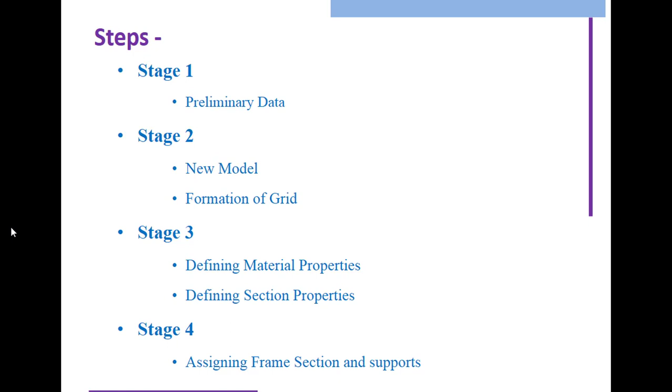After that, assigning frame sections and supports. When we construct everything, we need to provide the support to the columns, support to the building, like whether you want to make it sway or non-sway. Basically we make it non-sway, right? We provide fixed support at the bottom, because in fixed support we get three reactions: one vertical, one thrust, and another one is a moment. So these three reactions we will get in our fixed support.

Now after that, stage number five is assigning the load. We need to assign the different load conditions according to IS 875 and our manual calculations. After that, stage number six is the analysis and comparison of base reactions. This is one of the important steps. In this stage, we need to analyze and compare the base reactions we got due to the load combinations, the different loading results we are getting.

Then step number seven is defining load combinations. As I told you earlier in my Module 1 lecture: dead load plus live load, dead load plus wind load, dead load plus wind load plus live load.

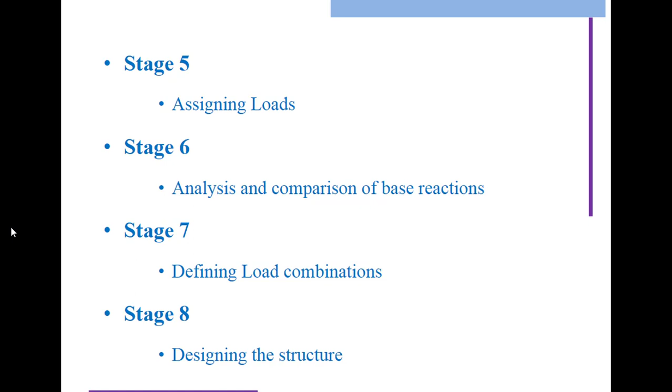Okay, these are three different kinds of combinations for collapse and serviceability that we need to check. After that, designing the structure. When you go through all these things, when you've got lots of checks, corrections and trial and error, after that we will go for the design of the structure. Okay, so let's see stage number one.

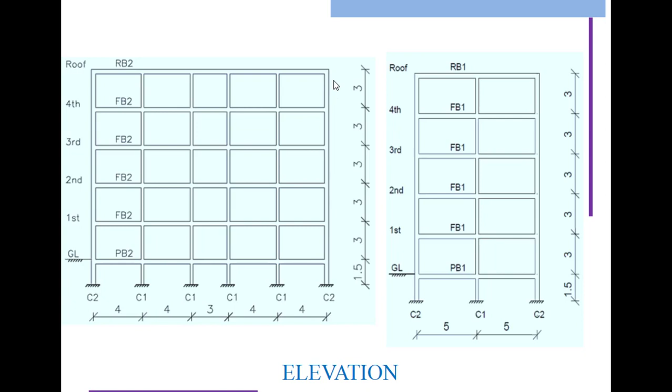After that, here you need to provide the material types, like concrete and rebar. Rebar is reinforcement. Specification like Indian M20 or Indian high yield strength deformed grade 415 bar. So we are using concrete M20 and rebar HYSD 415. Your columns are 300 by 500, 400 by 400, 400 by 500, and beams are 300 by 600, 300 by 500, 300 by 400.

You can see one common thing: the width is constant in all, and the depth is varying. Why? Because as the distance increases and as the story height increases, your depth will increase. And we are considering a slab thickness of 125. All these data are in mm.

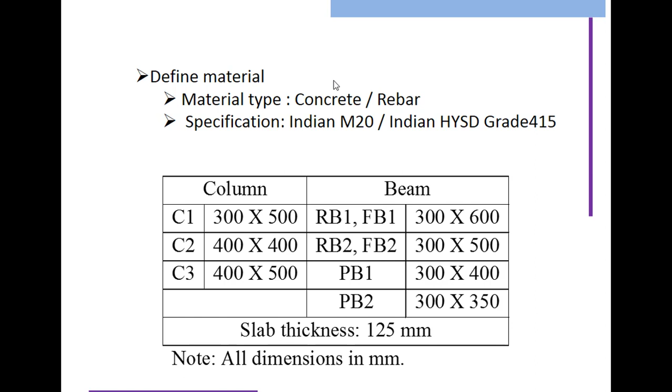After that, these important things you need to know, like grade of concrete, grade of steel, live load on roof, live load on floor, roof finish, floor finish, brick wall on internal beams, density of concrete, brick density, wall including. All these data are very important during calculation of loading conditions.

After that, stage number two. You need to create a new model and grid formation. How can we do this? You can see the SAP2000 view. Here you can select the blank one or the 3D frames and you can modify it. But here I'm doing the grid only pattern. After that, I can provide all the data.

If I go to this plan and make it on the 0,0,0 coordinate, this becomes my x direction. C2 to C2, this is my x direction, this is my y direction, and if I come in this direction, it will be my z direction. The same thing I have to do here. I need to provide how much in x, y, and z direction, and the number of grid lines.

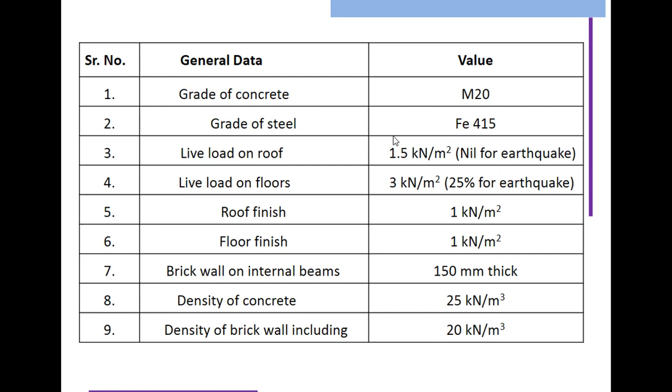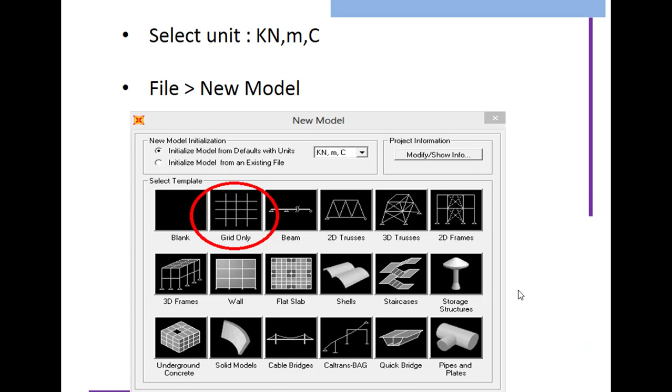So grid line means what? I can show you once again. This is your first grid line, second, third, fourth, fifth, sixth. So there are six grid lines in the x direction that you need to provide. Same in y direction, same in z direction. Now grid spacing: the spacing between two grids, like 4 meter, 5 meter, as in the available plan. Whatever we have, you need to provide.

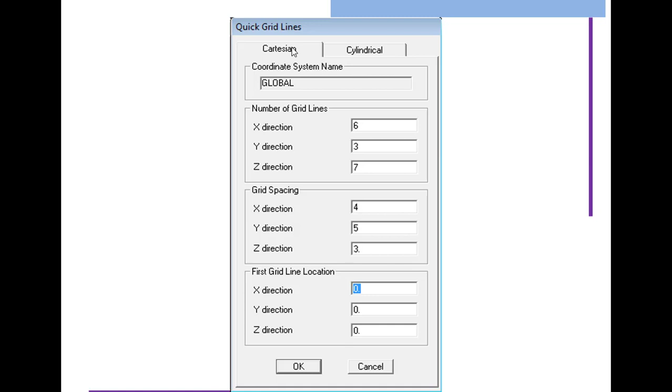And then first grid line location. As I told you, you need to provide the grid pattern on the 0,0,0 coordinate, meaning the origin. So xyz is at 0,0,0, and this we provide in the Cartesian system. It should always be global because it consists of xyz directions.

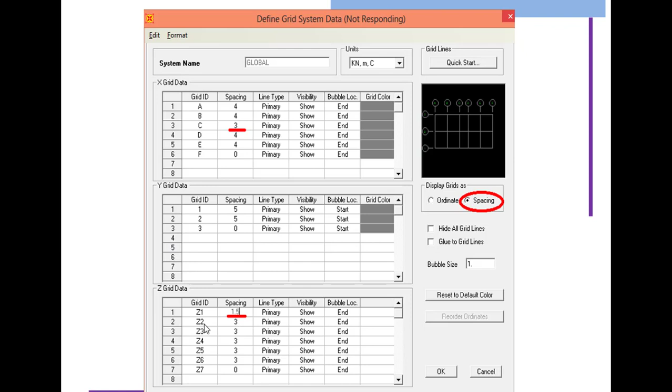On the x grid line we provide the grids and their spacing: A, how much spacing it has, B, how much spacing, then C, D, E, F. Similarly in the Y direction. After that, stage 2 is over. When you finalize the model, you can see the structure like this.

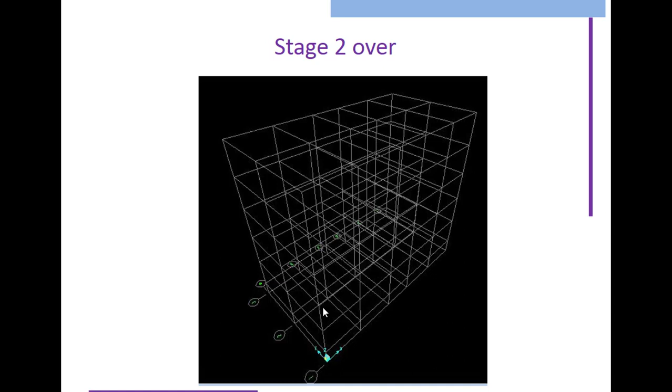Understand? So you can see this is the X direction. Okay, sorry, this is Y direction, X direction, and Z direction. Now the defining stages. So you can see the define material and define section properties. I'm just giving the overview of the ETABS software because during the implementation we will get to know each thing very properly. So now the define material properties and define section properties.

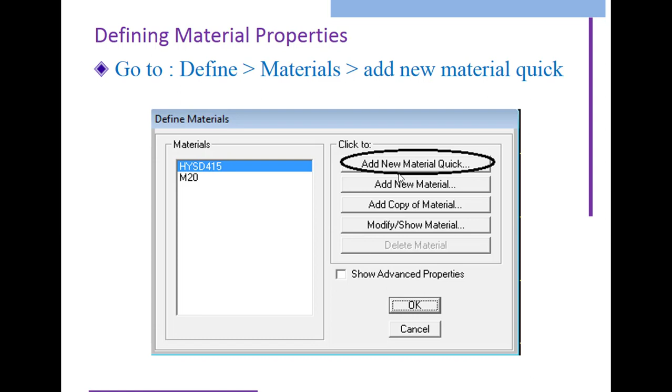Here you can see, as I told you, if I have to modify it, you need to click on that M20 grade of concrete, and you can click on modify, or you can add different kinds of material like M30, M40. If you want to add, you can go over here and add. If you want to add HYSD bar 500, 500D, you can go over here, click on add, and you will get the data. Now after that you can see these kinds of quick definitions you have to create.

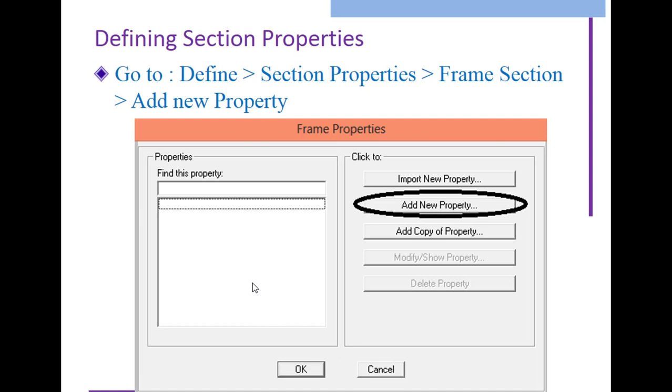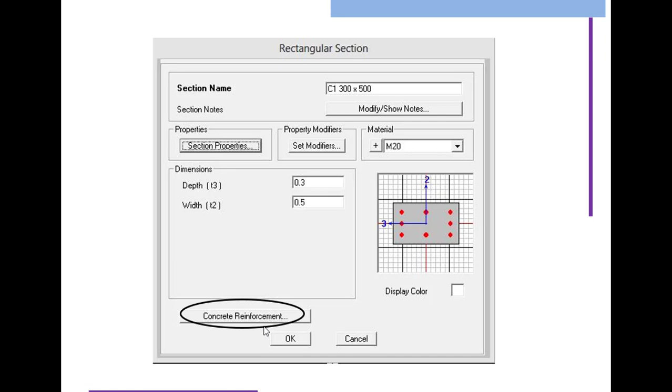Now properties also: if you want to create a section property like a beam size, you can go to add new property, click over here, create a copy, create a property, and it will show over here. So when you click on this line you get to know these kinds of structures like rectangular, circular. Here also options are given like steel; every kind of structure, material, and property is given over here. You just need to select and provide a dimension. As you selected column 1, you need to provide the depth and the width, the concrete reinforcement, and the name for the column.

After that, as you provided all the data, you also need to provide the design type, whether it is a beam or column. The reinforcement configuration you also need to provide over here. If it is circular, then the confinement bar is a spiral. If it is rectangular, then it is ties, the lateral ties we are talking about. You need to provide the clear cover, the number of longitudinal bars along the 3-direction faces and 2-direction faces, bar sizes, then lateral ties dimension and their spacing, and the check.

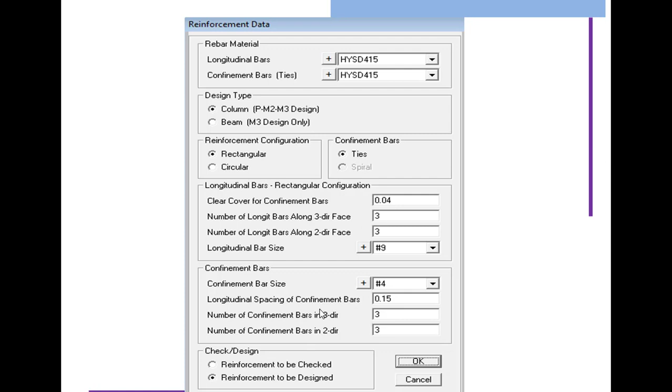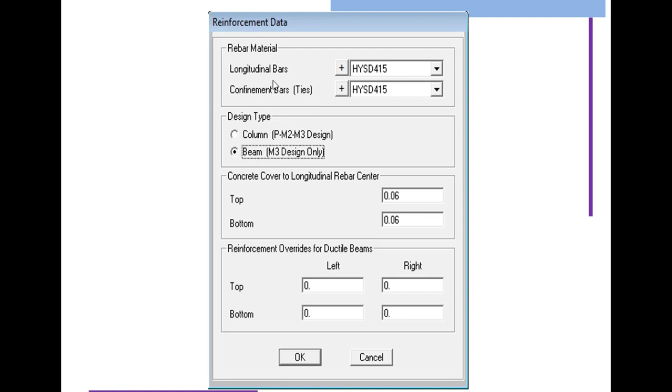Yes, this is one of the important ones: reinforcement to be checked or reinforcement to be designed. Always it is reinforcement to be designed, because if we check, it will always try to interpolate, and due to this our design may fail. Then when you finalize a section like this, you can get the section over here. I will teach you each and every single step so you know exactly what we have to learn. After that, similarly for a beam section, you can see I have provided a design type of beam. All this data we provided as per our plan, so the plan is very important.

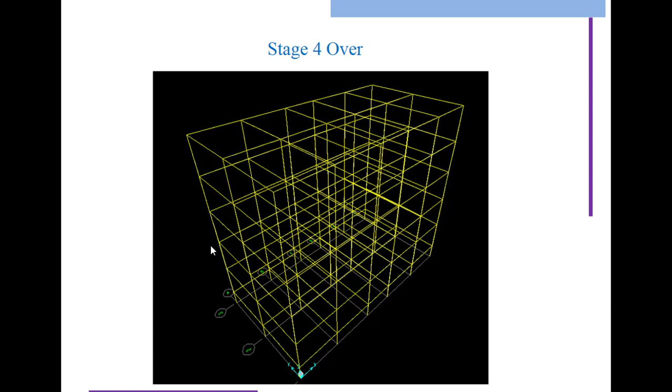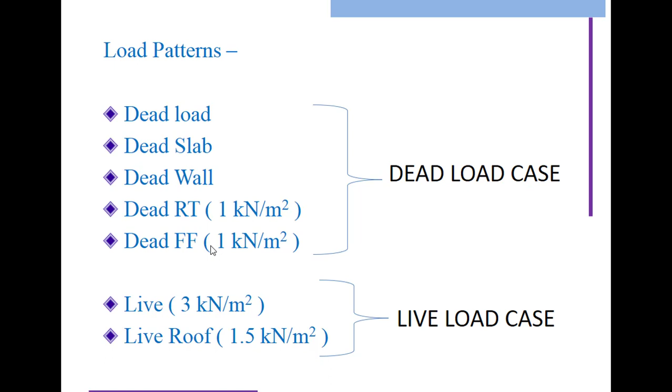Then the last step is assigning of frames. You need to select the frames, like the parallel X direction and parallel Z direction beams, and assign the beam property, then the parallel Y direction sections, and provide the column axis. Now assigning the load. We have different kinds of load patterns like dead load, dead slab, dead wall, dead roof treatment, roof load, floor finish, and live load. This we need to provide.

So if you have external wall load intensity, how can you provide it? 0.23 is the wall thickness, 1 is unit quantity, 3 minus 0.45 is the total depth, into 20 is the density. So what did you get? You got 11.73 kilonewton per meter. Similarly for the internal wall, and the parapet wall also.

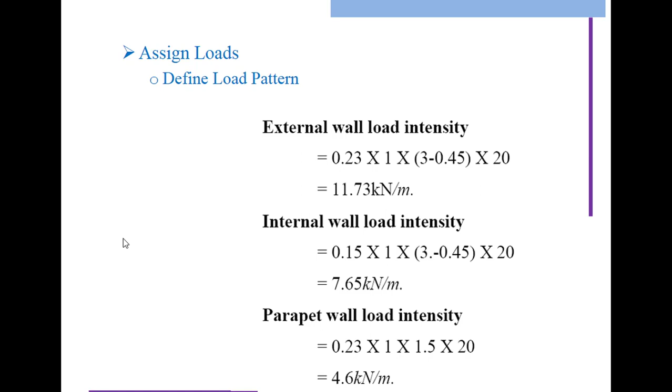But one thing is very important. What is 0.45? Here I am reducing the size of the beam. Here also I am reducing the size of the beam. Here only 1.5 is the height of the parapet wall, so I am taking that. So it is width into length into height into density. So we got this kind of loading condition. If you don't want to use these loading conditions, you can go directly to IS 875 Part 1 for dead load and live load.

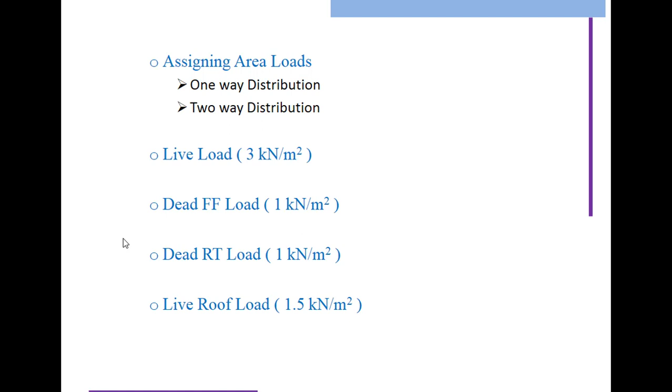Now the second one is assigning the area, like one-way distribution and two-way distribution. That is also an important one. After that, you can see this diagrammatic representation where the intensity of slab load is very important. How can you calculate the intensity of the slab load? It is calculated by the thickness multiplied by the density of the slab. So you got 3.125 kilonewton per square meter.

It is 4, make it half, becomes 2, 2. So multiply this intensity with this half distance of 2. You will get the data. You got the ordinate 6.25. It means at this point, at 2 meters, the top distribution point is 6.25.

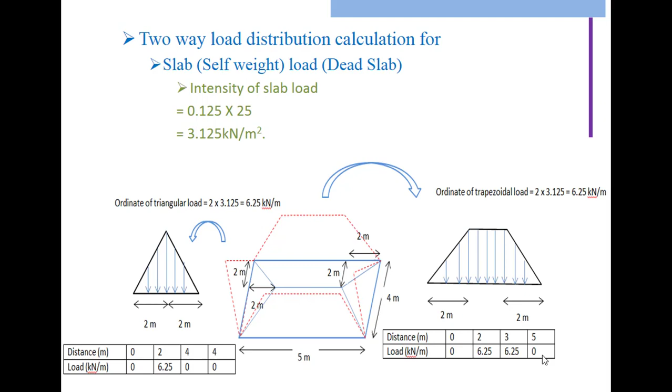So at 0 distance, your load is 0. At 2 meter distance, your load becomes 6.25. At 3 meter distance, your load becomes 6.25, and at 5 meter distance, your load becomes 0. So now you can see this kind of self-weight, live load, floor finish, roof treatment, and roof live load we need to apply.

So you can see how we can do these things. So you have self-weight of slab. At 0 meter distance it is 0. At 2 meter distance it is 6.25. So how do you get this? 2 multiplied with that intensity ordinate gives you 6.25. At 3 meter distance also we will get the same value. At 5 meter distance it becomes 0.

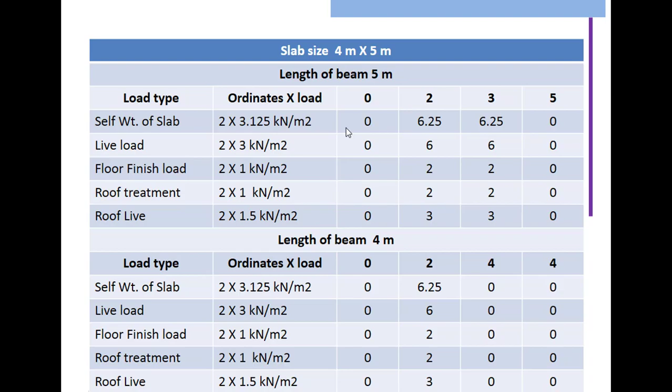Now if you have to provide the live load, how much are we providing? We are providing live load as 3 kilonewton. So 2 multiplied by 3 becomes 6. Likewise, we will provide all the load conditions. Now you can see this kind of loading conditions when we provide on a beam and column.

Now after that, how can you analyze and compare the beam reactions? It is one of the important ones. So with respect to column, we got this kind of load. With beam, we got this kind of load. Now this is the SAP reactions. I will discuss this further because if I explain it now, you're not in a position to understand.

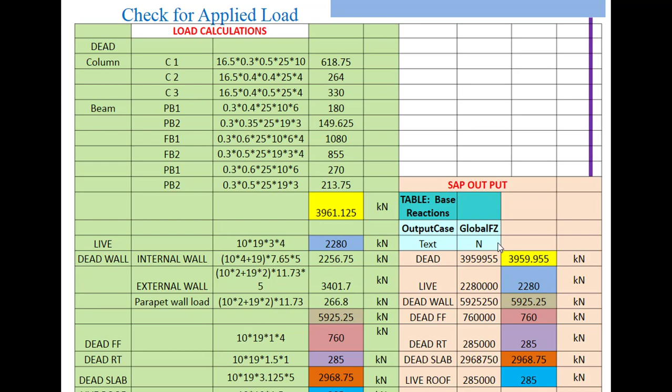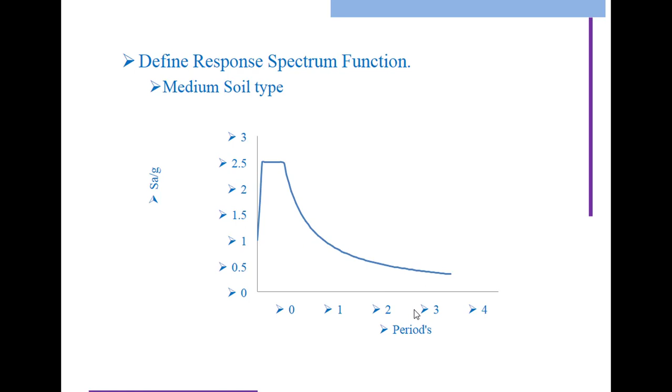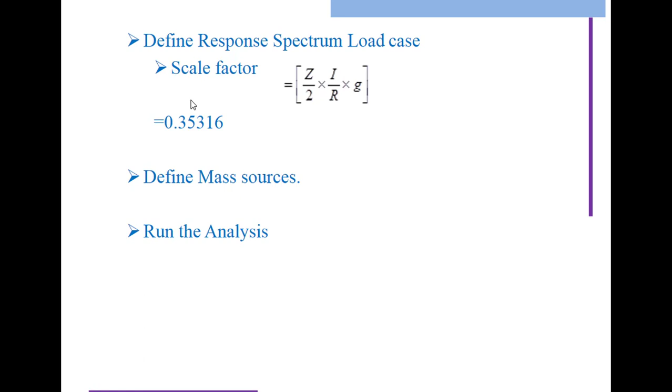Now, if you need to define the response spectrum load cases, the scale factor is defined by the formula Z by 2, I by R, into G, which equals 0.35316. No need to understand this formula, only the scale factor you need to understand because it is a common one, 0.35316.